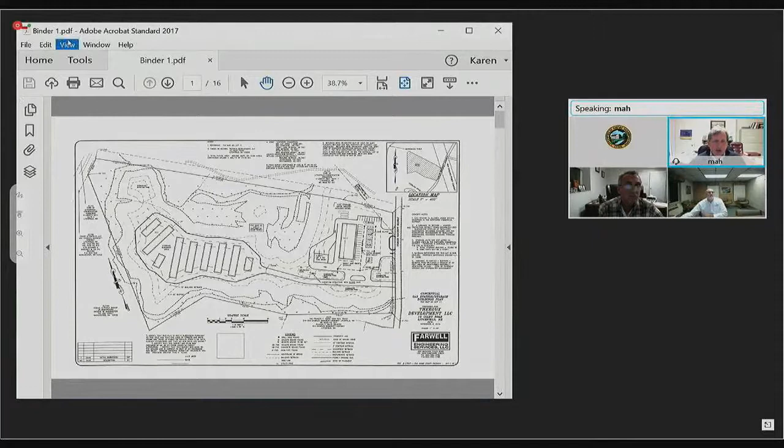A variance was granted, so we had a gas station and convenience store with an above-ground storage tank and dual pumps out front, and the tanks would go into an underground pipeline and then back up to the pump stations. Since that time, we have been honing in on a better design.

What you have in front of you is the original layout of the Farwell design that was presented to the Zoning Board of Adjustment. You can see on that plan there's a single building, over 9,000 square feet, with a 3-bay car wash in the back. Jim's arrow is pointing these out if you're able to see it. There were gas pumps in the front, and fuel storage above ground, which included diesel fuel. There were 3 tanks shown there where Jim is outlining on the northeast corner of the property.

After a lot of discussion with the town and some refinement working with Hayner Swanson and Frank Monteiro of GPI, we've come up with a new plan. We also received input from several people in town, namely our direct abutter across the street and our direct abutter to the north, that they would like to reconsider and revisit our choice of above-ground storage versus below-ground storage tanks.

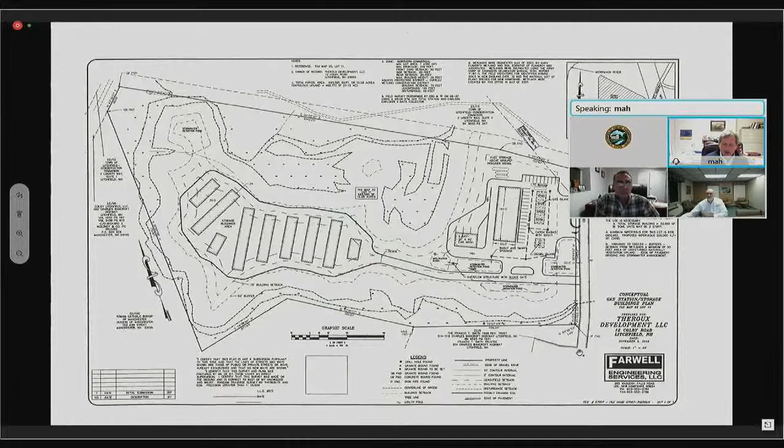After talking with Frank, we became convinced that the safety factors of above-ground versus below-ground are equal in terms of a spill, and putting them below ground actually increased the safety, because not only were they not there so nobody could run into them, they also weren't visible, and I think that was one of the concerns of the neighboring properties. So with that, we have applied for a variance.

The first thing we did was take a new look at the site plan, which is what you have before you, and identify that the building is a little bit smaller, the pump layout is different, and the car wash is going away. All of these things are different, and we're not here before you for those issues, but wanted you to see what we currently believe, and because it's different from the plan you saw before, we wanted you to see it. This is what we'll probably present to the planning board.

There are issues with the site, as you know, and I'll get into them on the 5 criteria, but there's a great deal of wetland surrounding the site and wetland buffers, so we have an unusual piece of property here. We have tried to lay out the storage facility in the back to stay out of the buffers, but there are going to be some drainage facilities that will encroach on the buffers, and we will undoubtedly be back to this board for relief by special exception for those. Those aren't particularly relevant this evening, but I just wanted to paint a clear picture for the board of how far we've come and why we're back to you more than a year later.

The first step in proceeding forward is we went to the Conservation Commission because they are a direct abutter to the north, and they also had a great deal of input in our first application to the ZBA. We had gone through the process with them, and they were affirmative, or at least not negative, as to the application for the gas station.

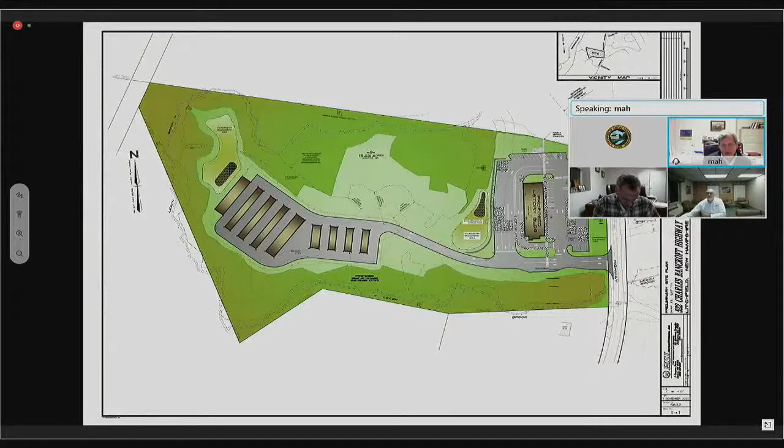So we proceeded back to the Conservation Commission, and at the Conservation Commission there was a great deal of discussion. Frank and Jim presented, and at that time the discussion was about the aesthetics and the safety, and the Conservation Commission actually preferred the underground versus the above-ground.

On this plan in front of you, you will see that the locations of the underground storage tanks have changed. There are two separate locations: one is towards the front of the property. So that's a change from the northern area where they were previously. And one is to the rear of the property, and Jim can highlight where that is. That's where the diesel truck fueling station will be for larger trucks. There'll be a diesel station out front, but the trucks will go to the rear.

This is the design that Frank's firm and Jim's firm have come up with as state of the art. So the locations have changed, and the Conservation Commission was very much in favor of us applying for a variance to ask for relief from your board to put these tanks underground.

The Conservation Commission has written a letter. I submitted it to the board, and I think they submitted it to the board, but I don't know. Jim, do you have the ability to call that up out of order?

For the record: Zoning Board of Adjustment, dated December 3rd, 2020. Dear Chairman Riley and board members, on November 5, 2020, the Conservation Commission met with Rene Theroux, his engineer Jim Petropoulos PE with Hayner Swanson, and Frank Monteiro PE of GPI Engineering, regarding the gas station at Tax Map 22, Lot 11. After listening to the extensive discussion with Mr. Monteiro, the commission voted unanimously to agree that underground storage tanks for the gas station would be much better aesthetically and environmentally. We took into consideration that everyone in the north end of town is now connected to public water. If the applicant went with above ground tanks, there would be considerable visual impact. We are satisfied that the containment with triple walled underground fiberglass tanks and ongoing inspections will satisfy NHDES and aquifer protection. If you have any questions, please feel free to contact me. Yours truly, Joan McGibbon, Chair, Litchfield Conservation Commission.

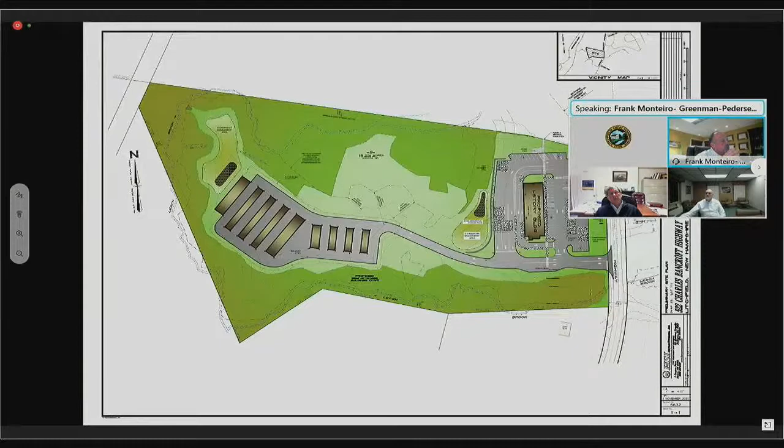Jim, maybe you can flip to my plan so it's easy to see on the next sheet, please — just rotate it a little bit so you can see better. Again, in front of the convenience store, the canopy's got 4 dispensers, so you can fuel 2 vehicles at one dispenser at a time, meaning it can fuel 8 vehicles total.

To the rear, you see 3 islands, and there are actually 3 dispensers on those islands. This is a much more efficient design than the original, which just had 1 dispenser in the middle with the truck going on either side. Under this scenario, a truck typically has tanks on each side of the cab.

In today's truck fueling facilities, what we want is a master dispenser on the driver's side of the truck and a satellite dispenser on the passenger side, so the driver can fill up both tanks simultaneously with high-speed nozzles. This is much quicker, and you don't have to throw the nozzle under the truck or pull it around to the passenger side — it's just not as safe to fuel under those circumstances.

So even though there are 3 dispensers here, I wanted to point out there are still 2 truck fueling locations. It's much more efficient, high flow, and safer in terms of the filling procedure.

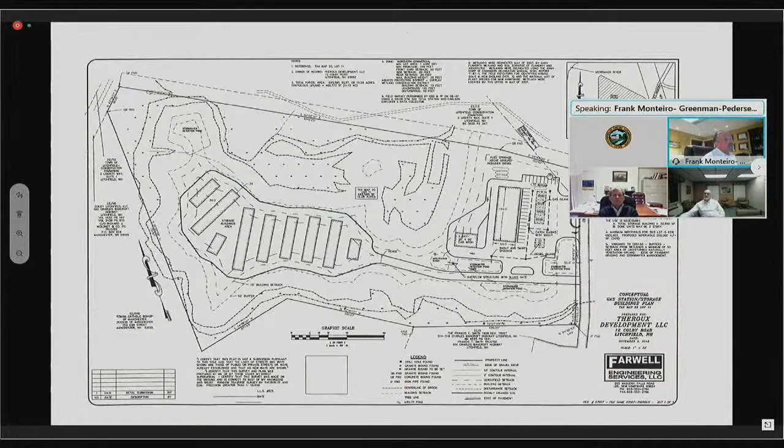Yeah, so that was my point. In the original plan that the board saw, the prior variance, there were 3 above ground vaults, and I don't know why, but there were 10,000 gallons each, so 30,000 gallons above ground. If we were going to use above ground vaults and we needed to get 60,000 gallons of storage, we would need 5 of those vaults, because the maximum size vault I've seen is 12,000 gallons. So we would need 5 of those, which takes up a substantial amount of room, as opposed to these 3 triple wall fiberglass tanks that we're proposing.

So in your original plan, it was 30,000 gallons that was going to be stored above ground, or 60,000? Originally, it was 30,000 gallons on the above ground fuel vaults that the board originally approved. Okay, so it's gone up. I was not involved in that project, so I'm not sure how the 3 vaults was determined, to be honest with you.

And what you're basically saying is that that really wasn't a viable number for the business, this is a more realistic number. Yeah, as I mentioned, if with those 3 tanks you limited your regular unleaded storage to 10,000 gallons, you would have to make many more deliveries to the site with fuel tankers to keep that tank full. So we try to minimize fuel tanker circulation on site by providing basically twice as much regular unleaded storage in this design. Okay, thank you. Anything else?

I'm good. Go ahead. We're all set with questions for now.

Okay, thanks. Jim, if you could go to the next slide, please. We're just going to differentiate what was originally proposed to the board versus what we'd like to do here.

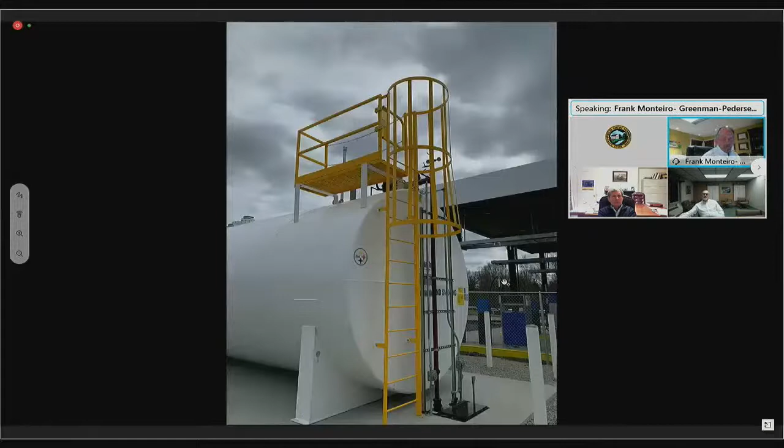The next slide just shows what an OSHA certified access platform looks like. This is one we installed on this tank that has a ladder and a platform, or catwalk, on top with a railing. This is what you would need to gain access to the top of one of these tanks to service it.

And again, that above ground tank, in terms of size, if we were to do a 20,000 gallon tank, it's 10-foot diameter round, and that one there is 35 feet long. In terms of sizing, this is an exhibit, an illustrative drawing of what we're proposing for this site.

This is an illustration provided by Containment Solutions, which is the manufacturer of the tank we would use. Containment Solutions is owned by NOV. NOV is the parent company.

Typically in New Hampshire, double wall containment is required on UST systems. I couldn't find a triple wall tank on these folks' website, but this is a double wall tank, and I'll explain the differences. On a double wall tank, there's an inner tank, and these are fiberglass. There's an inner wall, which is fiberglass, and there's a space, then an outer wall, also fiberglass. That interstitial space between the two layers is monitored with a brine solution, which is outlined in green here. It's a liquid filled into the space between the two walls.

There's a reservoir on top of the tank, delineated with the letter I to the right, on top - it's like a little dome. That's always full of brine, and there's an electronic probe on top that monitors the level of that liquid in the interstitial space. So if there's any kind of leak from the interior wall, that brine solution will go into the tank, and the brine would go down in that dome, setting off an electronic alarm on that sensor, which goes back to an electronic console located in the convenience store, shown schematically above.

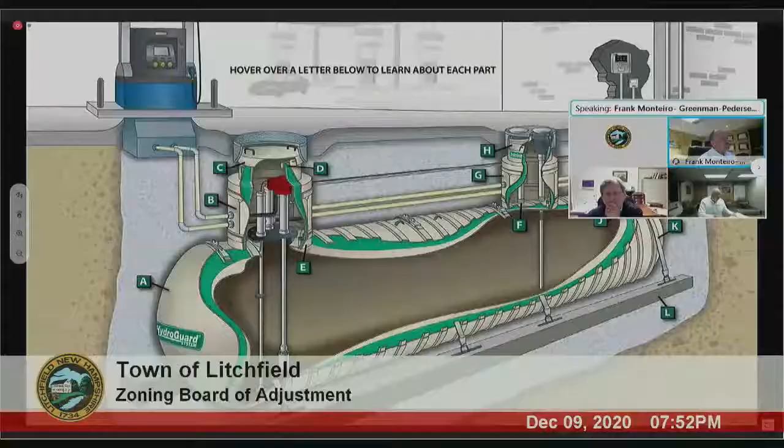I don't know that that would ever happen, but the groundwater fluctuates daily. In the spring you're going to have higher groundwater levels than in the summer. So it'd be highly unlikely that you'd ever have a level at one consistent elevation, never mind at the top of that dome.

Correct, and I just wasn't sure what the water level was over in that area. Yes, yeah, I don't know if we know that. Interesting. So, I mean, it sits in the aquifer, so I don't know. Yeah, I would assume so - I don't know if I'm asking the question for you, but are you trying to ask what the water tables are like in an aquifer district? Do they fluctuate? I know they fluctuate, I just wasn't sure what that specific district would be.

If normally this would be above the water level or... If I may, Mr. Chairman, I'm Jim Petropulos with Hayner Associates. We've actually dug some test pits in the front of the site.

Can you hear me? Yeah, we're getting a little echo there, but we can hear you. That was my next question. We did some testing in the front part of the site, in the location of the proposed tanks. We went down 10 feet and did not hit water in either test pit hole. We had an estimated seasonal high staining of soil at 9 feet in one of the pits, but the other pit, down at 10 feet, had no evidence of any estimated or groundwater whatsoever. So my testimony is the testing we've done to date out there was good testing - groundwater down 10 feet plus in those locations. Good enough?

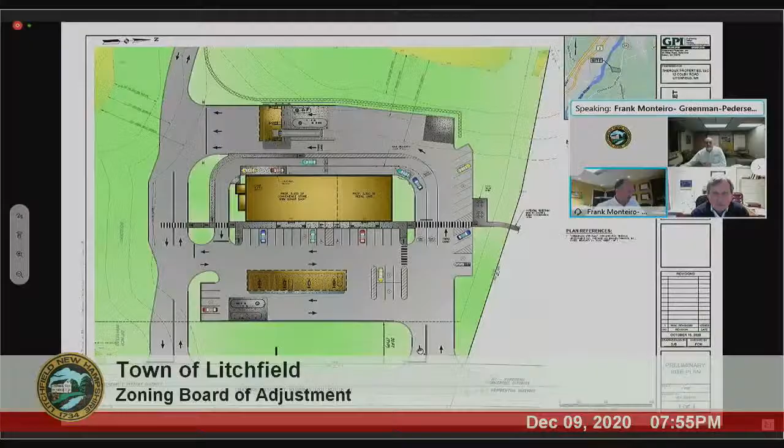Hey Jim, if you could go to that tank exhibit again. Thank you.

So that's good information on the seasonal high water table. These tanks here would be 10-foot diameter tanks, buried 4 to 5 feet, somewhere in that range. So the bottom of this tank hole is typically 14 to 15 feet deep.

So it sounds like the groundwater would never reach the top of the tank, based on Jim's testimony. We designed these tanks assuming a worst case scenario that the water table could rise above the tanks. So for buoyancy reasons, we put these concrete dead men in, which you see on the slide along each side of the tank, attached to straps that wrap around the tank.

It's labeled as K on the far right of that exhibit. So there's a series of straps that actually hold down the tank to prevent any buoyant action, in the event that the water table ever did come up high and the tank were empty. It's just something we would do normally. In terms of the next safety precautions that are part of this system, the tank sumps on top of the tank have 2 round larger manholes. The one on the left houses the actual pump, highlighted in red. So the pump, it's kind of deceiving, everyone calls it dispenser pumps. In the old days, the pumps used to be up in the dispensers, but now the pumps are actually down under the ground. That submersible pump goes down into the tank and it pressurizes the fuel lines and sends fuel up to the dispenser.

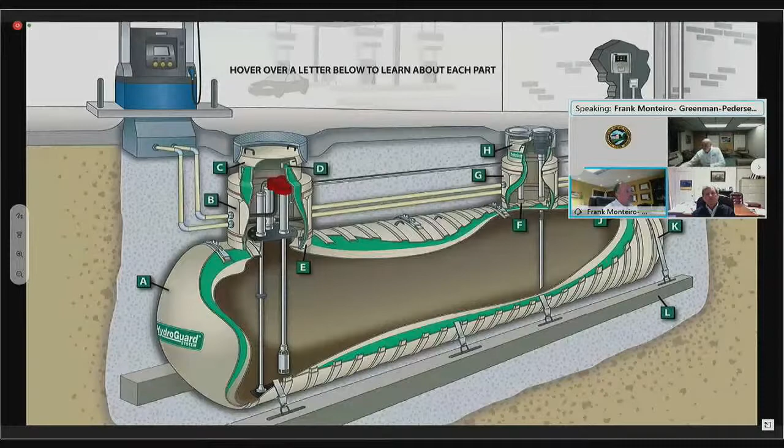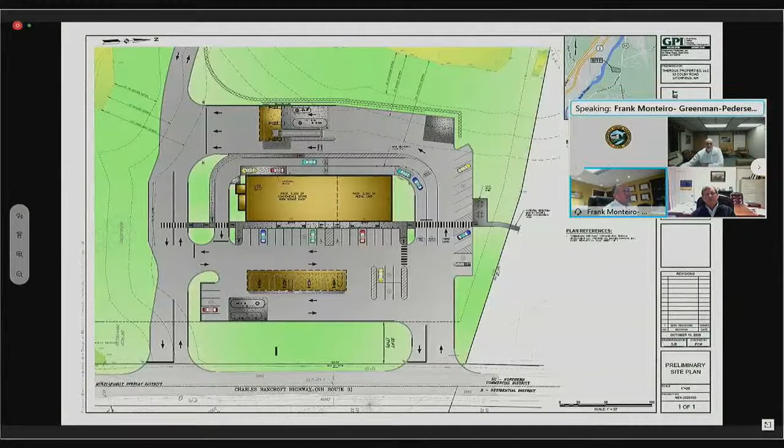All right, I'm gonna ask another probably obvious question, or hopefully an easy one. I don't know if you'd be the right person to answer this, but let me ask you along the lines of comparing above ground storage versus underground storage. When I look at risks...

Risk for leakage - you've talked about the natural decay of the material and how fiberglass is better than steel. I get all of that, but we didn't really talk much about the other safety precautions you need for above ground tanks, like bollards or security fencing. Clearly the risks to an above ground tank are things like people driving a car into it, or vandalism, as you mentioned earlier. When you put that tank underground, what type of risks exist once it's underground? What natural effects, outside of aging, could possibly damage that tank? Anything?

No, I mean, the potential risks are buoyant forces. I've seen tanks that aren't anchored pop out of the ground. You can see some pretty good videos online of tanks just physically coming right out of the pavement.

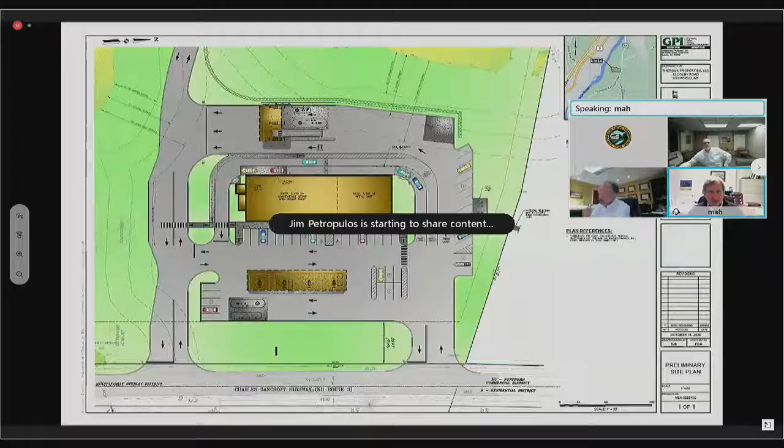And it's a very short letter with a lot of info. Here it is, I'll just read it for the record.

In response to your recent request, I'm pleased to submit my analysis of a variance request to allow underground storage tanks instead of above ground tanks in the Aquifer Protection District. This analysis is made to determine what effect this variance would have on surrounding properties. I have performed similar services regarding the subject property within the past 3 years as an appraiser.

Site and abutting sites were inspected and photographed on May 13th, 2019. I've reviewed and analyzed the variance application and corresponding zoning ordinance.

Surrounding properties consist of conservation land on lot 13 on the road and abutting on the north, plus more conservation land to the rear, lot 10 going back to the Merrimack River. Appears to be an auto service business abutting on the south at the road. That's lot 9, and a Catholic school on lot 100 and behind lot 9. Across the road on lot 8 is Litchfield Sand and Gravel, that would be Continental Paving, with a circa 1879 house in poor condition is likely being restored.

I don't think Chet had a chance to visit the site today, but if you all know, it's been restored, and so that process I think is either done or near done.

There are high voltage transmission lines across the eastern tip of the property. There are buffers on both sides and the rear of the property. This is a very busy street with a variety of commercial uses in close proximity. The subject's gas station would be on the north end of the lot near the conservation land.

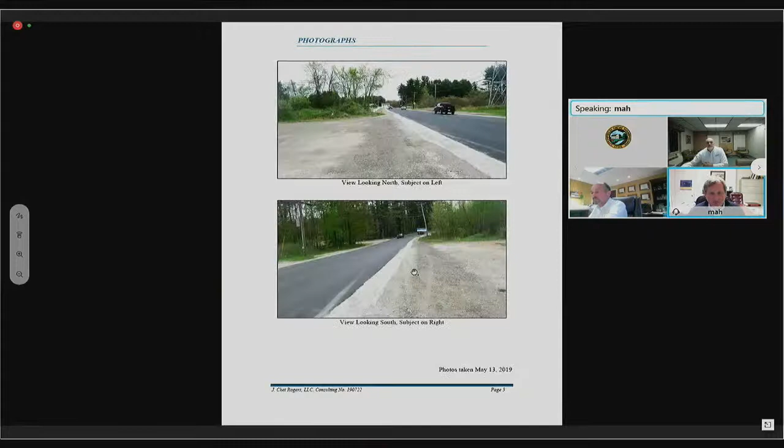So that covers the diminishment of abutting property values. The fifth one is the unnecessary hardship argument.

As I've argued this case before, this is a unique piece of land surrounded by a great deal of wetlands and wetland buffers, making it a hard piece to work. It is right on the road, a busy road. It's in the northern commercial district, and we think we found a use that marries up with that site. But obviously, because it's in the Aquifer Protection District, we have this issue of fuel lines underground and tanks underground that we have to get over.

But we think due to the uniqueness of this site and the fact that it abuts the Conservation Commission and has so much wetlands, that the enforcement of the ordinance to this lot prohibiting underground storage based upon the technology today bears no fair and substantial relationship to protecting the aquifer. In other words, we think you can vary the ordinance and protect the aquifer even better. And I believe we've demonstrated that this evening.

New technology, new detection systems, better materials. And now we've heard from Frank how underground is in fact better than above ground. So there's no fair and substantial relationship. And even the Conservation Commission recognizes this with their recommendation to this board.